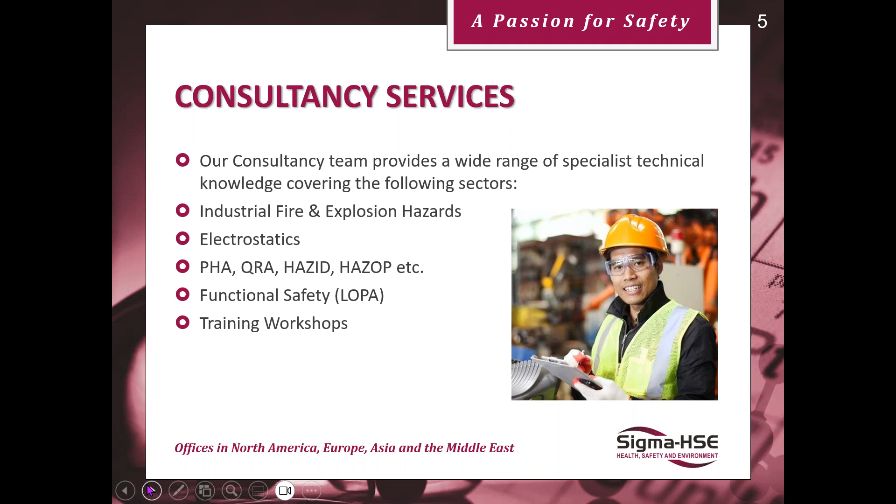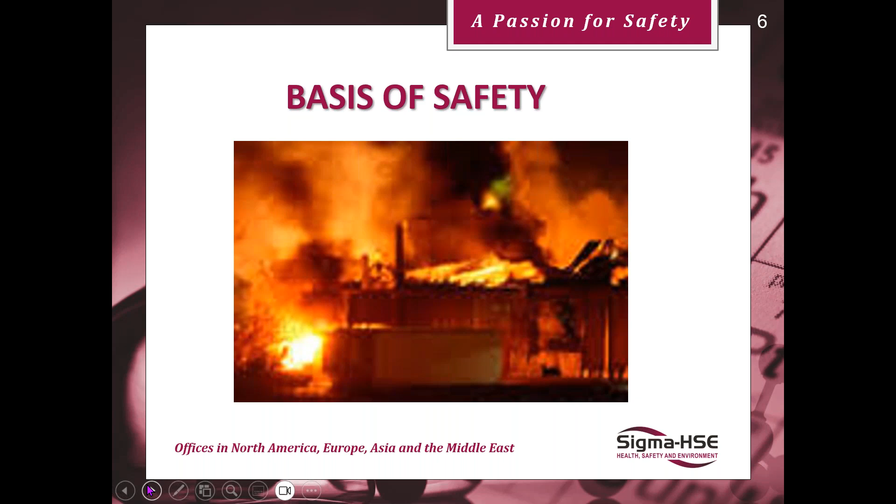So, off with the introduction, and now let's get into the nitty-gritty of the talk. We're looking at a basis of safety, and whenever you're looking at especially problems to do with fires and explosions, this is your ultimate aim, to put together a basis of safety so you can show to the regulatory authorities and your work staff that you are working safely.

So what is a basis of safety? Well, it's a combination of measures relied upon to ensure safety. It's not just one thing. You look at a whole range of things to get this combination together. It highlights the aspects of design and operation which are safety critical. Overall safety strategy can be applied to things like equipment, the process itself, the area where the process is located, and work instructions such as standard operating procedures, etc., or following equipment manufacturers' guidelines.

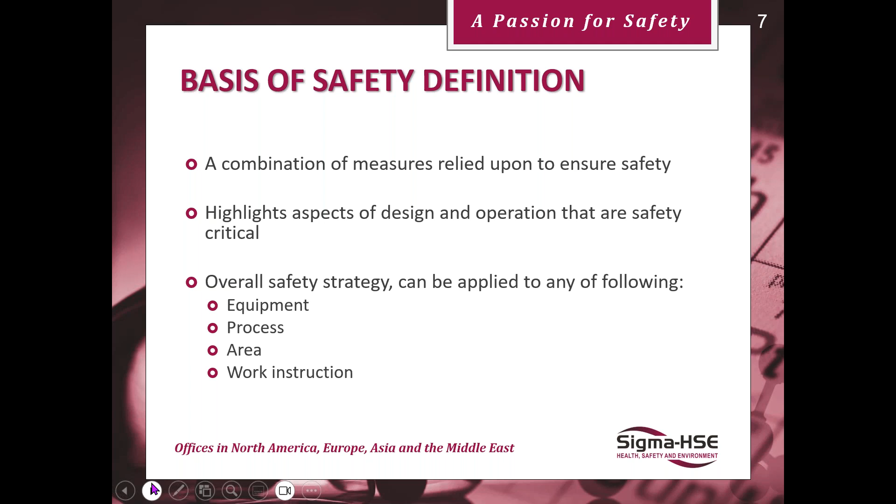In order to build a basis of safety, it is necessary to have information available. So a typical list, if we came in on your site and we were developing a basis of safety for you, we would like to see equipment specifications.

We'd like to consider what operating procedures you have in place to ensure that your staff are well trained and operate the equipment safely. We can review your hazardous area classification drawings, and of course with those drawings you should always have a report which tells you how those drawings were produced.

Maintenance procedures are always necessary because we need to know how you work. How do you maintain your equipment? What are your procedures in place for it?

Such things as what materials are being handled. Are they flammable liquids only, flammable dust, a combination of the two? And have you got data on them? For instance, for powders, we would look at minimum ignition energy, layer ignition temperature, minimum ignition temperature, the KST or dust constant, Pmax, etc.

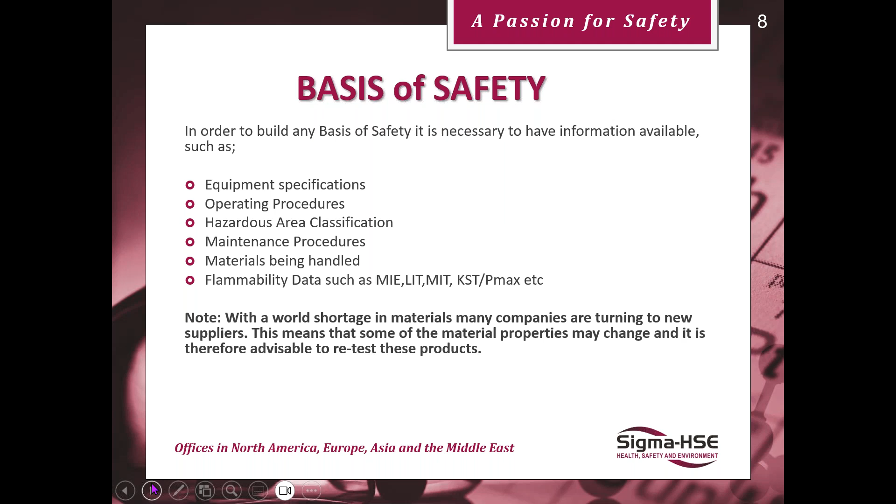And always remember that with the world's shortage in materials, many companies are turning to new suppliers. This means that some of the material properties may change. You may get finer materials or not so fine materials. They may be slightly different in their outlay, and therefore it is always advisable to retest these products if you do change your supplier, especially on a global scale.

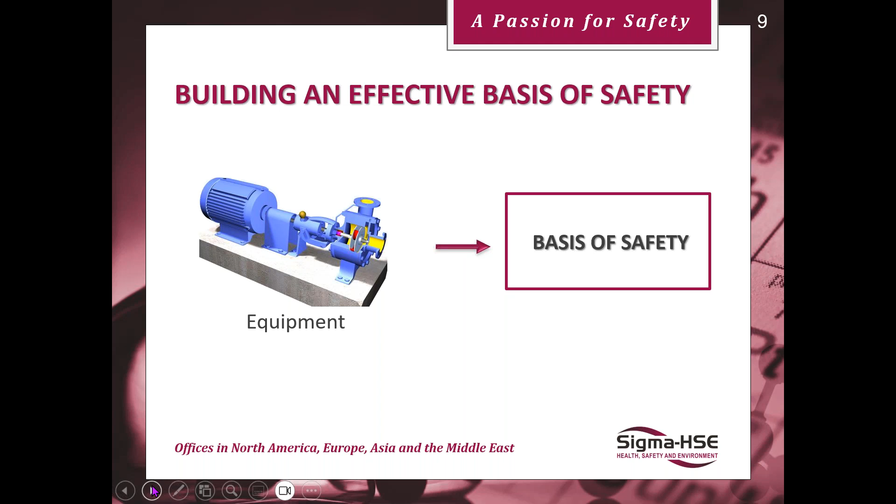So building an effective basis of safety, we start off with the equipment. This could be any type of equipment from a pump, silo, mixing vessel, etc.

Procedures, operational and mechanical. Standard operating procedures are common in industry, and nearly every company has them in place to ensure their staff are well trained on the use of their equipment and materials they're handling. This will go into the box of basis of safety.

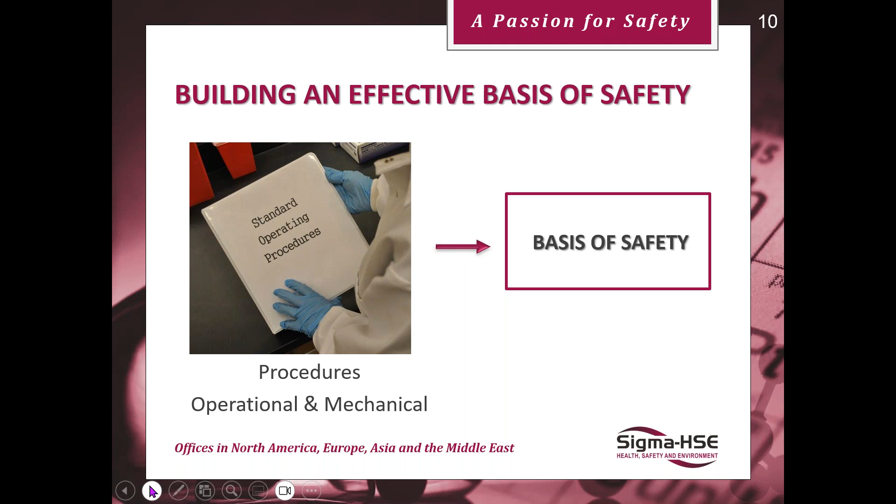So you may have to review it and change accordingly.

Human factors. Well, these are debatable. As you can see here with the Simpsons, they can be extremely intelligent or, in this case, very stupid. So you have to factor these things in. How can a human being affect what is going on with your basis of safety?

One of the advantages of a human is that if you're used to using the equipment, you can smell things, you can sense things are not right by your hearing. You may hear a rattle in the equipment or a grinding sound, which won't be picked up till later by sensors, but the human can pick it up.

On the other hand, the human being can do the absolutely amazingly stupid things, and these have been known to happen quite frequently. So you have to look to see how much you rely on human interaction with your processes.

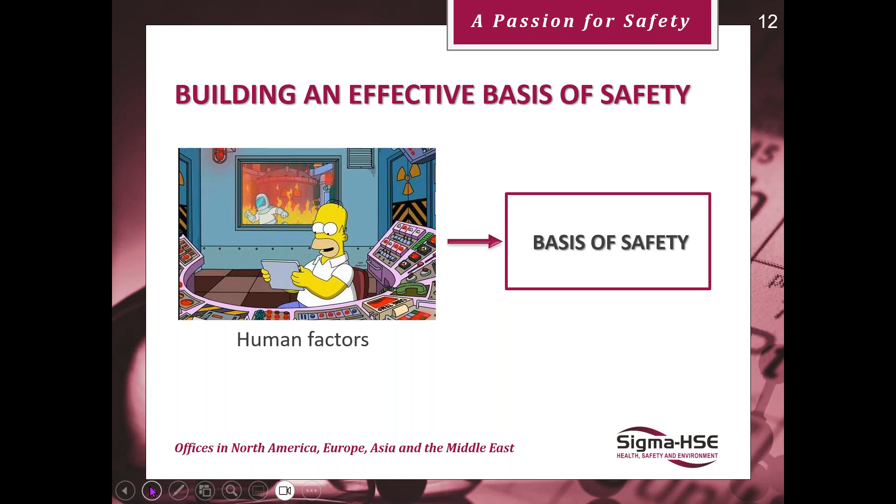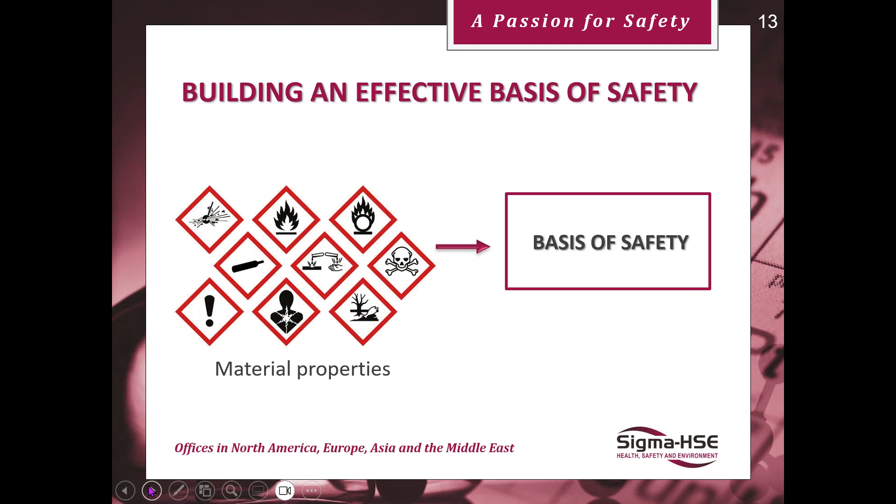Risk level and tolerance. Do you have a high risk that you can deal with, moderate risk, or a low risk? It depends where you're located a lot of the time.

For instance, if you work in a greenfield site in the middle of nowhere, you may not mind your explosion vents going off every day if you explain it to your staff. But if this is in a town next door to housing, you can't afford to have that happen.

We've had instances where a silo is on a hill and below it is an infant school. Again there, you can't have any risk at all. You have to double brace everything to ensure you work safely. You cannot afford to have an incident.

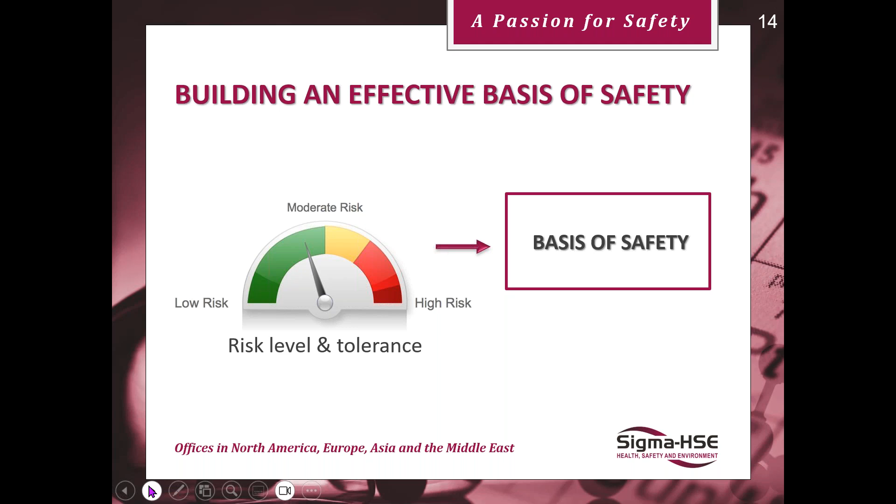And of course, there's many more. When you start looking at your processes, you may find other things which interact with the way you work and could affect the basis of safety.

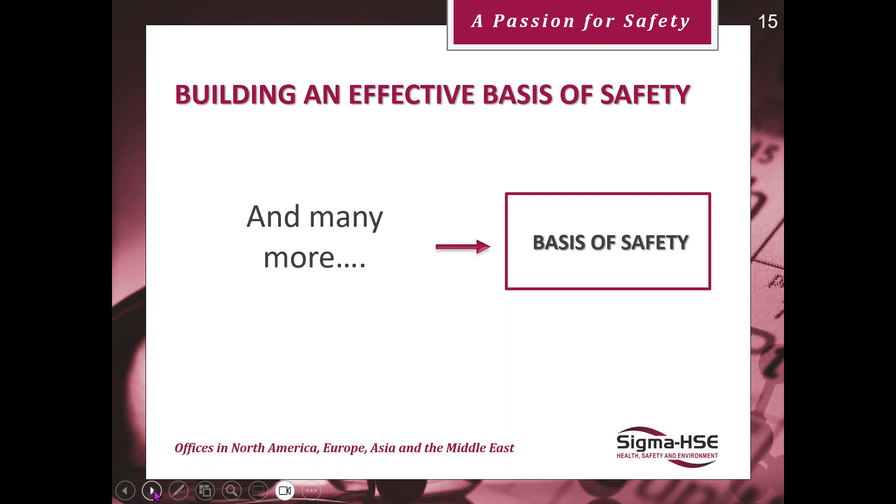We're looking at fires and explosions, and there's three types of basis of safety for fire and explosions. First one, explosion prevention, achieved by avoiding the flammable atmosphere. This could take out the fuel or take out things like oxygen or even the ignition sources, which is far more difficult to do. Avoidance of ignition sources.

Make sure that any ignition sources don't become active and don't become effective. Well, that's the most important thing. You can have an active ignition source as long as the energy is not strong enough to ignite your fuels. So, does it become effective?

And an often case for fires and explosions to do with dust and powders is explosion protection. It reduces the damage to plant and protects employees from the explosion.

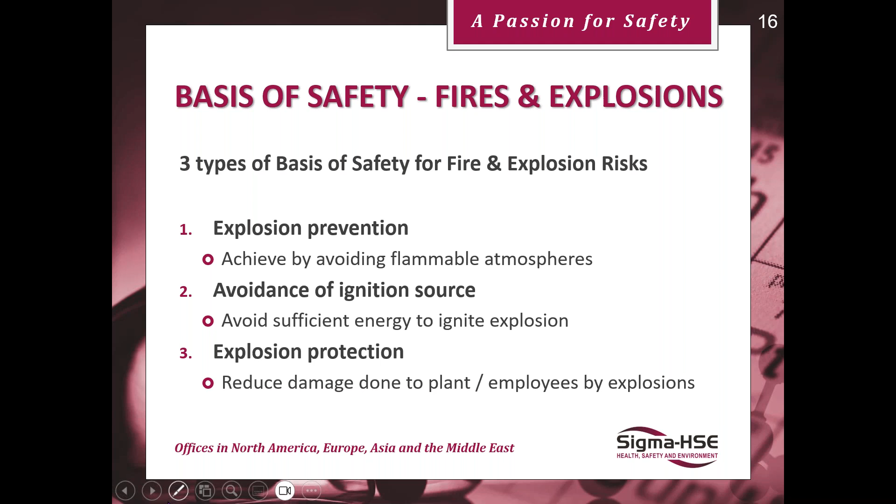So the conditions for a dust explosion. Firstly, the powder that you're dealing with has got to be flammable or combustible, and in the case of an explosion, has to be airborne to form a cloud.

As per liquids, the concentration must be within the explosible limits. Interesting here that we only take the minimum explosible concentration, we don't have an upper. That's because with powders, it's not homogeneous, and therefore you may have an explosion concentration occur when a bulk of product comes through a line, for instance.

You must look at the particle size distribution. If it's finer, then it's more capable of propagating flame and explosion.

The level of oxygen around needs to support the combustion, so you need to have an answer about that. You may work under reduced oxygen levels, but how low do you have to go to save your plant from blowing up? And you must have a sufficiently energetic ignition source, as I said before.

So down here we have the fuel, an ignition source, effective that is, and an oxidant. And then we get the fire triangle. If we add mixing of the oxidant in the fuel and we confine, then we get the risk of an explosion.

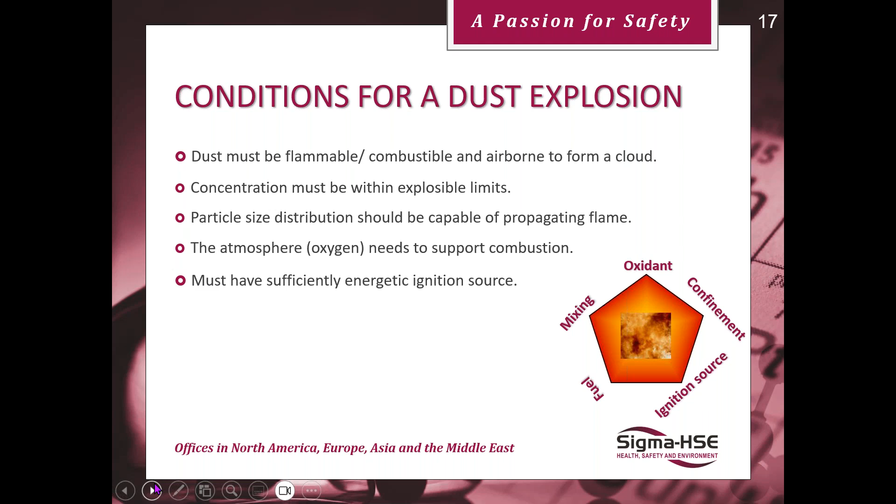So why is flammability testing so important? A lot of people say it's a waste of money. A lot of people say it's expensive. A lot of people say they haven't got material to use for it. Lots and lots of excuses out there not to get it done.

But at the end of the day, it's cheaper to get the testing done than to rebuild your plant because you haven't had it done and you don't know how to protect yourself properly. There's nothing worse than living with limited information to be able to make sure you're safe.

So you require it to understand the explosive properties of your materials. You may need it for the sensitivity of your materials to different types of ignition sources, such as mechanical, electrical, electrostatics, heat. It can help you determine whether you can stay outside the flammable limits. As I said, the upper is more difficult, but you may be able to work with good extraction below the MEC. And it's actually a legal requirement on European safety data sheets as of 2021.

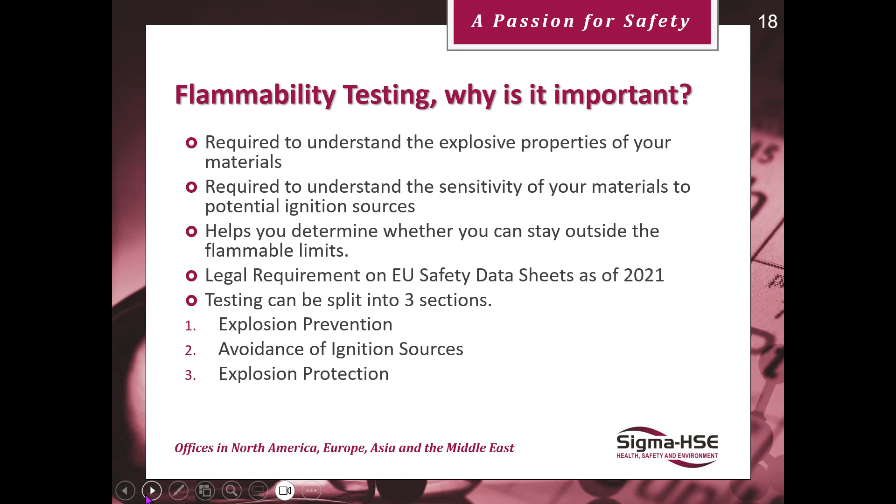Testing can be split into 3 sections, as I said before: explosion prevention, avoidance of ignition sources, and explosion protection.

With regards to the safety data sheets, or the SDSs, Annex 2 of REACH has been amended concerning the compilation of safety data sheets on the 1st of January 2021. And now it's a legal requirement on these sheets to include data: flammability, MIE, LIT, MIT, PMAX, KST, etc.

Lower and upper explosion limits, that'll be for liquids and gases, but for dust you want the MEC. And for liquids you may get the flash point and auto ignition temperature as well. But these are now compulsory.

So just pulling out powders and dusts, what are we going to look at? Well, you've got a whole range here. We can start with minimum ignition energy, which looks at electrostatic and mechanical ignition risk.

Minimum ignition temperature considers dust clouds on hot surfaces. Layer ignition temperature considers layers of powder on hot surfaces. And explosion protection or violence, you get the maximum explosion pressure, the dust constant, KST, and the dust class.

ST is Staub, so German, so you get K, ST, dust constant. MEC considers flammable range, minimum explosive concentration. LOC, limiting oxygen concentration, if you're thinking about inerting.

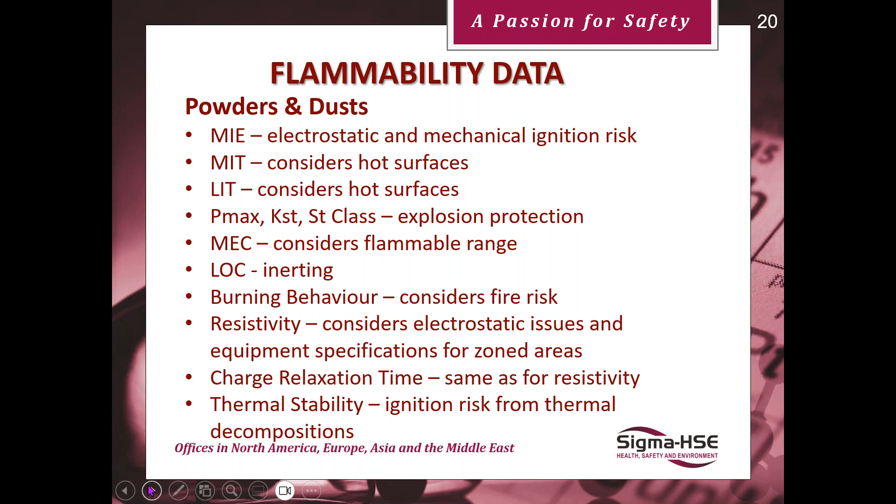So let's look at explosion prevention first.

The Group AB classification test uses the same tube as the minimum ignition energy test, similar piece of kit. It determines whether a material will form a flammable atmosphere when dispersed in air as a dust cloud. If it does, you're then subject to DSEAR and ATEX, Dangerous Substances Explosive Atmospheres Regulations, and Atmosphères Explosibles, the French term for explosive atmosphere. This originates in the EU, but more countries around the world are adopting this approach to ensure safety.

So we get two categories: Group A, flammable or explosive as a dust cloud, and Group B, non-explosive or non-flammable as a dust cloud. Just because it's Group B doesn't mean it won't ignite as a powder layer, so be aware of that. Group A is covered by DSEAR and ATEX, Group B is not. These tests are conducted under British Standard EN ISO 80079-20/2, 2016.

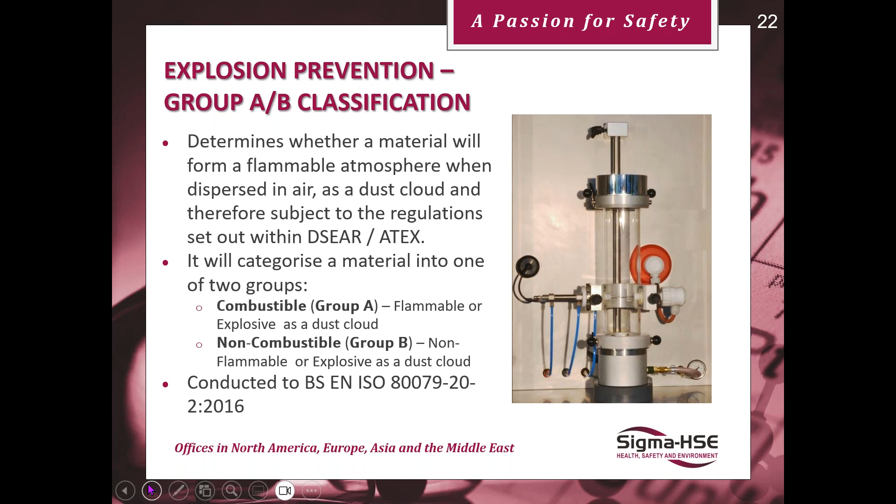Limiting oxygen concentration is the minimum allowable concentration of oxygen in a mixture of dispersed combustible dust, mixed with air and inert gas, in which an explosive atmosphere will not occur. It's generally higher than for gases, typically 10 to 15%, although some pharmaceuticals I've been involved in have gone down to 4%, which is extremely worrying since a lot of people use 5% as their basis of safety. In two or three instances, pharmaceuticals have gone down to 4%, so it pays to get it tested to make sure.

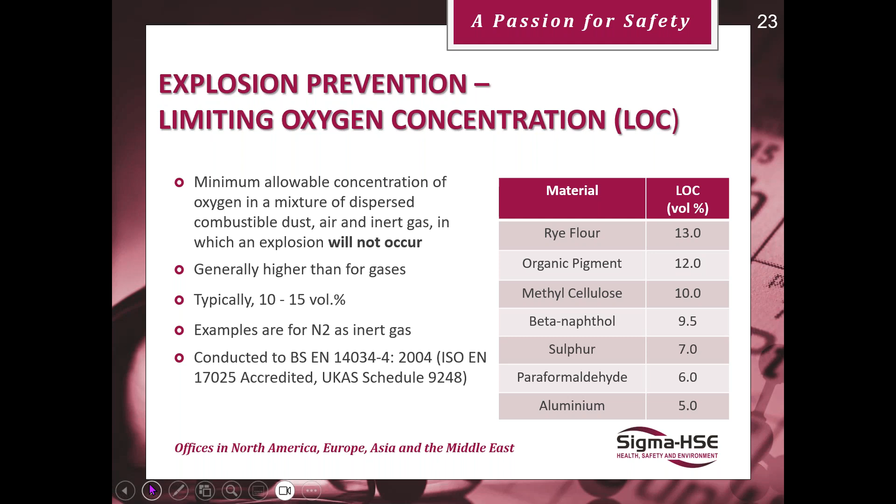Explosion prevention can also look at the minimum explosive concentration, the minimum quantity of dust dispersed in air required to form a flammable atmosphere. It's measured in the 20-litre sphere test, no prizes for guessing why it's called that. Sometimes the MEC is referred to as the lower flammable limit for powders, again under 14034, this time section 3, 2006. A typical example: 2 metres away from a 25 watt light bulb, 40 grams per cubic metre, you can't see the light bulb. Whoever came up with that, I'd like to meet them, because I haven't got a clue why they use it. But we've had dust MECs down to a lot lower than that, down to 20 grams per cubic metre.

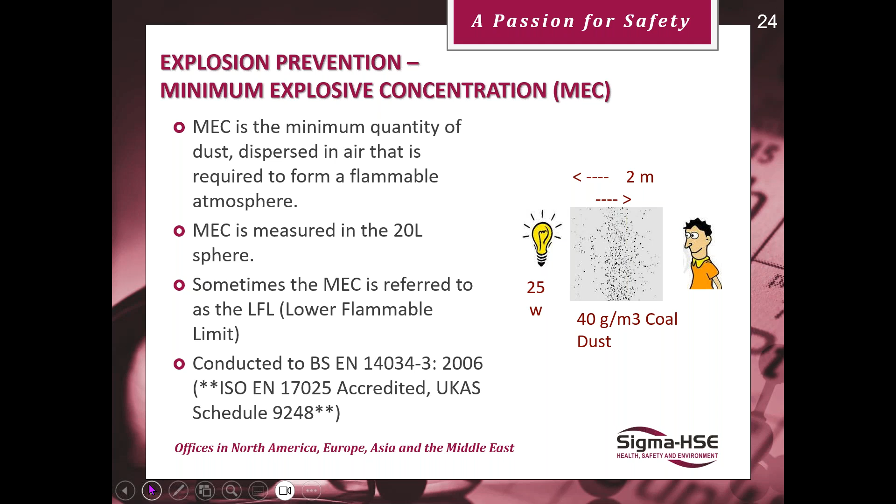So next, we've gone through explosion prevention. Now looking at avoidance of ignition sources, a separate basis of safety. This is taken from EN 1127. You can see 13 effective sources of ignition spaced out there. In reality, we only tend to look at about 6 to 7 of these, but we do take note if we're in areas where you may get visible and HF electromagnetic radiation, or radio frequency electromagnetic radiation. In some instances we may need to add to this, but normally it's about 6 to 7 that we concentrate on.

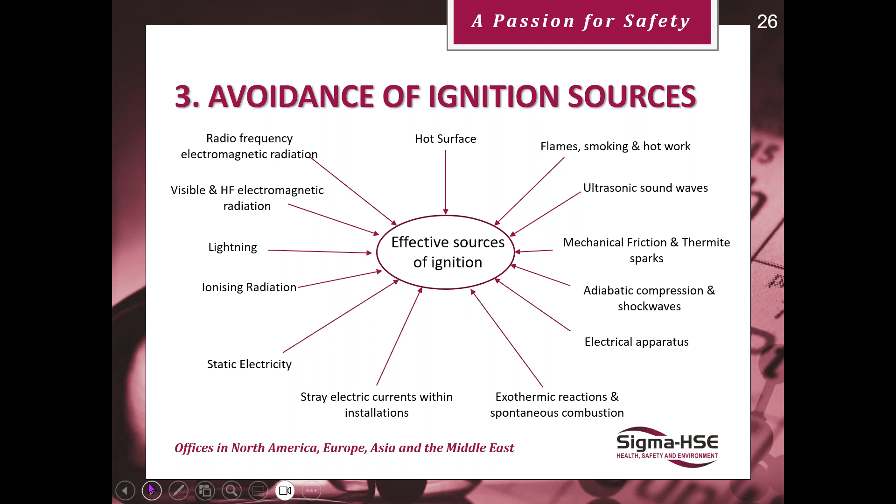Electrostatics - this is the minimum ignition energy, the lowest spark energy that can ignite the optimum mixture of fuel and dust. It ignites the optimum mixture. Every mixture has its ignition energy, but it is only one MIE.

Normally, for electrostatic discharges, you would find the capacitive discharge method used, purely capacitance. This is similar to a human being sparking. Be careful if some companies offer the VDI method of testing, as they may give you the mechanical spark instead, the inductive discharge. Sometimes these can be a factor of 10 lower than the purely capacitive one, so be very careful when you get the data. You should only use the inductive discharge method for mechanical sparking, not for electrostatic discharge.

Any ignition source with an energy greater than the material's MIE is capable of igniting the flammable atmosphere. In Europe, it's BS EN 13821 of 2002. And we've also got 80079-20-2, 2016, which is the electrostatic Bible in the EU.

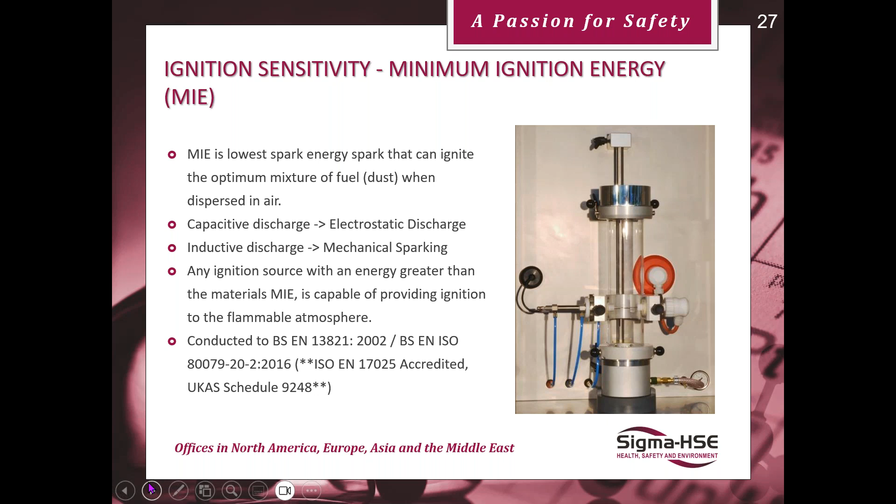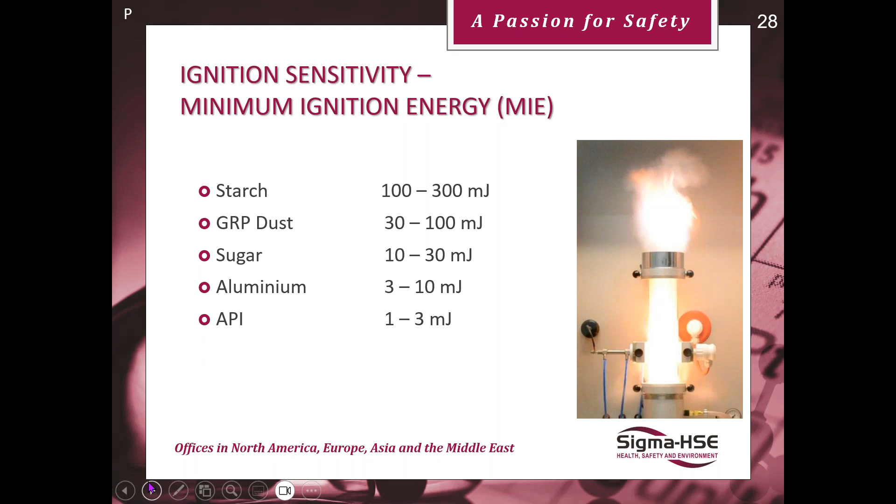Typical values here: starch 100 to 300 millijoules, glass reinforced plastic dust 30 to 100 millijoules. Sugar 10 to 30, though very fine sugar can go down less than 10. Aluminium 3 to 10, and active pharmaceutical ingredients down as low as 1 - in fact we've had them lower than 1. So again, you have to be careful with your products and understand what you're working with. Some are very high, 500 millijoules plus, and you may not have a concern with them, but the lower the ignition energy, the greater risk you're dealing with.

Talked about the minimum ignition temperature, MIT. This is the lowest surface temperature that can ignite the optimum mixture of fuel when dispersed in air. MIT is basically the auto-ignition temperature for dusts. So you have AIT for liquids and MIT for dusts.

It's used to calculate the maximum permitted surface temperature of equipment, and you can operate in the range 200 to 700 degrees C. We conduct it to BSEN 50281/2/1, and again, you can find it in the ISO 80079-20-2 2016 standard as well.

Complementing the MIT is the LIT. This looks at layers as against dust clouds. LIT is the lowest surface temperature that can ignite a 5mm layer of material. It's used to calculate maximum surface temperatures of equipment, and if you want to do this, you must combine it with the MIT value. The range is 200 to 400 degrees, and it's to EN 50281-2-1.

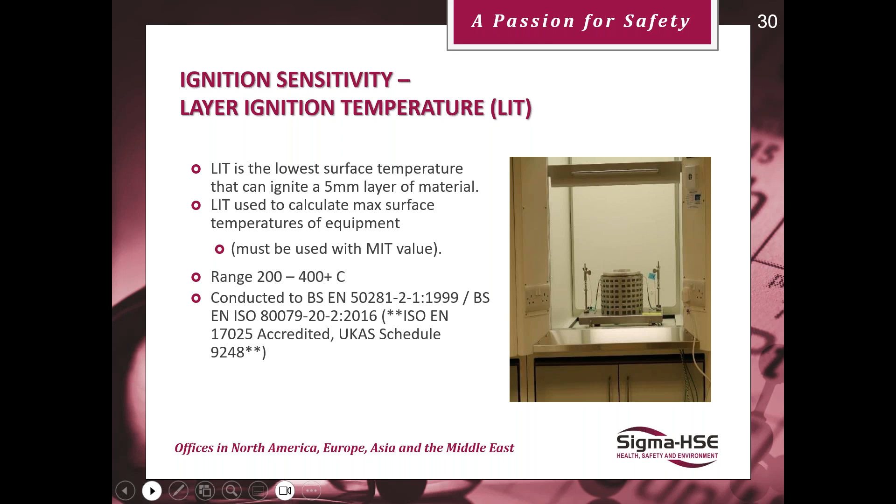So most common ignition sources: electrostatics. The risk is normally quite high due to some dusts having very low MIE values, down to less than 1, similar to gases and vapors.

You consider flames and hot work. If you have these around, the risk is high, but often these are covered by operational procedures to stop flames being present and control hot work temperatures.

Hot surfaces: risk is moderate as many values of MIT and LIT are quite high, although some materials do have much lower values, such as sulfur or sulfur salts. These can be as low as 200 degrees.

And electrical sparks. All electrical equipment must be suitable for use for any given flammable dust. So you must look at the hazardous area classification and the material you're putting through in that area.

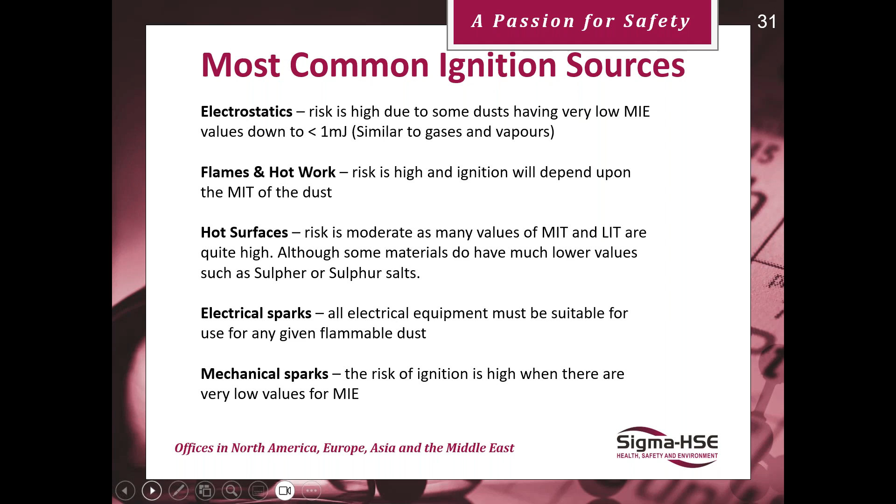A high level of risk is mechanical sparks. Here the risk of ignition is quite high, especially when you have low MIE values. As I said, you do this test with inductance and combine it with the MIT value.

So looking at the dust explosion risk here, you can see we've got mechanical, overheating, open flames, electrostatics, welding, electrical, and others, which no one's managed to find out what caused the problem.

Overall, there's about 40 dust explosions yearly across the world. This can result in injury and loss of life. You may end up having plant repair, compensation, and reputation damage, because a lot of people don't want to work with a company that's blown up their plant.

It causes business interruption and loss of the market, because while you're not producing, someone else jumps in and sells their product. And of course, you've got the insurance company. They're not too happy with reinsuring you if you've just blown your plant up through negligence.

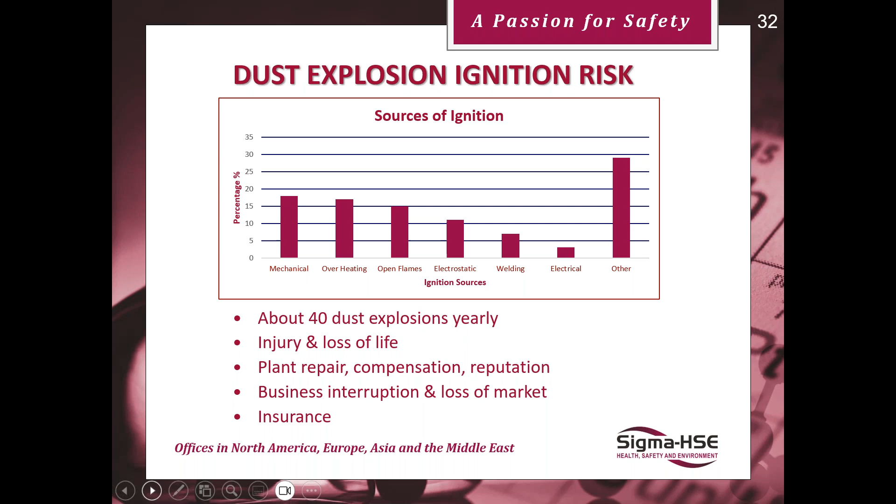So let's look at hot surfaces and temperature classes for dusts. As I said before, these involve two pieces of kit. The maximum surface temperature of the equipment is decided with the LIT or MIT of a worst case material that you're using. The temperature class of the equipment exists so that it can be properly specified for this application, and this will tell you what temperature class the equipment can be in.

So if dust clouds are likely, then the Tmax is less than 2/3 of the MIT. If dust layers are present as well, then the Tmax is also less than 75 degrees off of the LIT. Usually, because the LIT leaves the material for a longer period of time, this ends up giving you a lower result. So normally the LIT tends to constitute the maximum surface temperature.

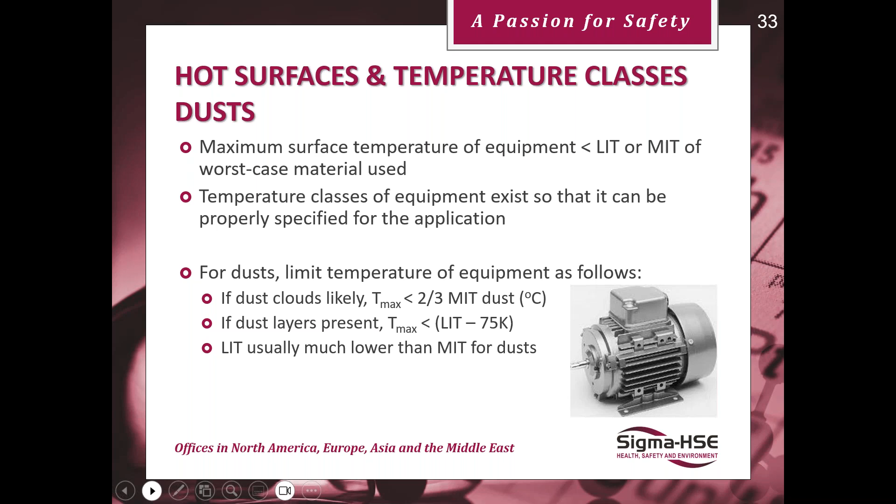Mentioned flames, smoking, and hot work. Well, hot work should be controlled by permitting. This is quite common today, and it should be the norm across your factory where you work. People should not be allowed to work with hot work or flames unless they have a permit to do so.

And a word of warning here, it's not a case of just issuing a permit. Before you issue the permit, you need to find out in detail what materials are in that area. Are there materials still left in the equipment when they finish, etc. So it's not a case of just writing out a permit. You need a lot more information on it before you allow people to use flames or hot work in that area.

Make staff aware of the hazards to avoid likelihood of common ignition source problems. Talk to your staff. Explain how these materials ignite. Get companies like us in to give a short training session for technicians or people working with these powders so they have an understanding and they're not scared of it, because they understand you understand the problems and you're handling them correctly.

Not so common today, but smoking must be banned in hazardous areas, in fact right across the factory, and only permitted in designated areas. Also control all access to hazardous areas. In other words, if people are working in hazardous areas, you need to control the movement of people in and out.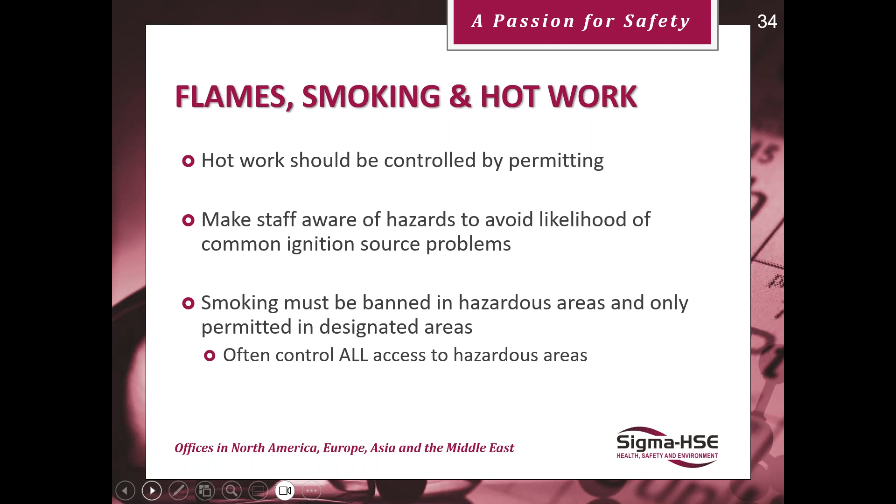Electrical equipment for dusts. Electrical apparatus in hazard areas must be suitable for use in the area depending on the following: the MIT and LIT, as said before, for surface temperature, zonal classification of the area in which it is to be located, whether it's zone 0, zone 20, zone 21, zone 22. You need to look at ingress protection, the IP rating, and the type of powder.

Is it conducting or insulating? Conducting powders can be very dangerous with electrical equipment because they allow the electricity to flow across the powder.

A typical example here is the European sign of conformity, the EX, which shows explosive atmospheres, Group 2, Category 2, dust. EX there means it's been tested properly and understood by a registered test house. And TB is the type of protection, 3C, so it's fairly low, temperature of 80 degrees C, and protection of Db. This is the typical sort of thing you will see on a label on a piece of electrical equipment.

Electrical equipment must be installed and maintained by competent personnel. We recommend people who are CompEx certified are the only people allowed to work in hazardous areas and wire up, put in, and take out electrical equipment.

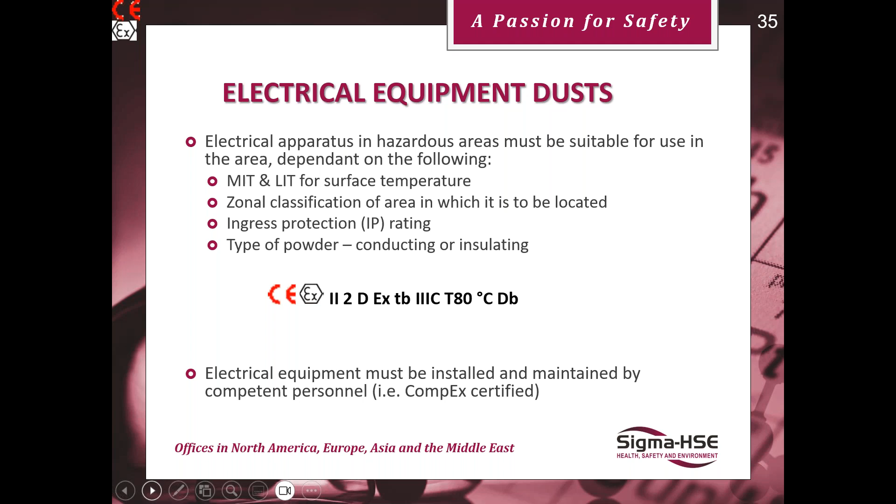Equipment in hazard areas should undergo a non-electrical equipment ignition risk assessment, or NEIRA, showing that you've looked at it for mechanical sparks and mechanical ignition, and the non-electrical equipment is as safe as your electrical equipment.

How do you prevent mechanical sparking? Reduce the energy below the MIE of dust. If you get a low MIE, the chances are you stand more chance of getting a spark. So the MIE needs to be as high as possible to stop the sparking.

Use slow rotating equipment. Less than 1 meter a second is the norm, and if you can do that, the risk of ignition diminishes considerably. Make sure you've got things in place to remove tramp metal or stop it getting into the system and foreign bodies getting in. Consider externally mounted bearings and seals rather than internally mounted bearings.

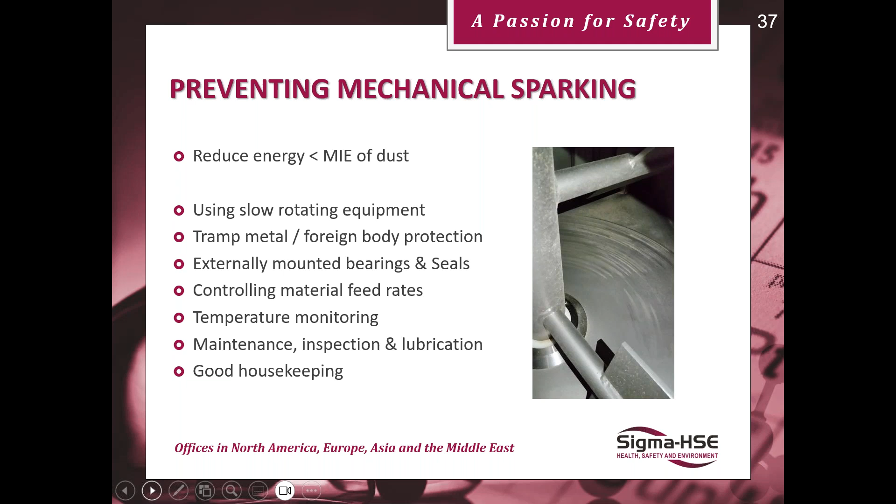So, non-electrical ignition risk assessments - quite a list of things we should look at. The European form of conformity marking, ingress protection ratings, know the speed of the moving parts.

Consider earthing of the vessel. That includes things which rotate - these have to be earthed along with the stationary things. The materials of construction - is it made out of aluminium, stainless steel, plastic? Is it made of brass or what?

Temperature rises and ratings of your equipment. Do you get sparks being emitted? Can they be emitted? Check out the equipment. As I showed you the previous one, they didn't realize that the blades were hitting the end, and the maintenance people hadn't even noticed it.

Selection of materials to avoid electrostatic discharges. Normally you're stuck with what you've got. It's very difficult to avoid electrostatic discharges because you're producing a product and you have to stick with that product. Avoidance of frictional contact between steel and certain alloys.

Make sure that you are aware of the different types of alloys. For instance, if you have a rusty blade and you hit aluminium, then you can get a thermite spark.

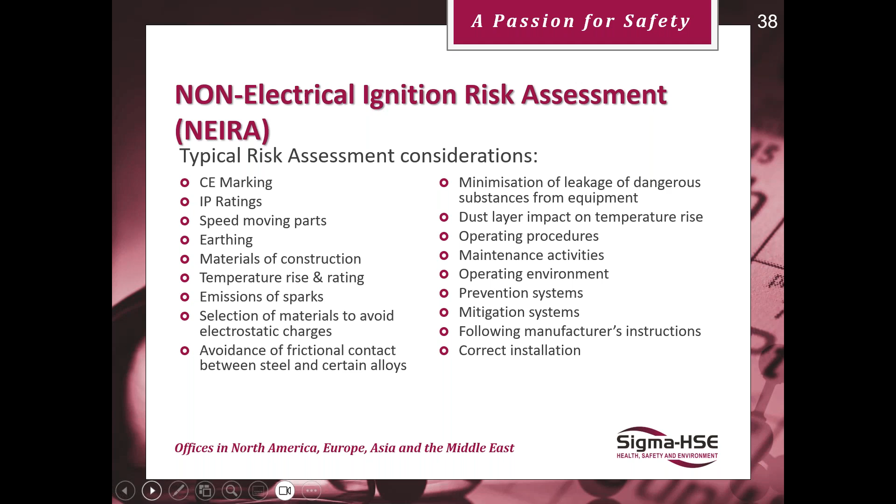Is it salty near the sea? Is it near a potentially gas or vapor area, etc.? Have you got prevention systems in place? Do you have mitigation? If something does go wrong, can you mitigate the risk? Are you following manufacturer's instructions correctly? And has all the equipment been installed correctly by trained people that understand the equipment and know how to fit it in, including competent engineers to look at the electrical installations?

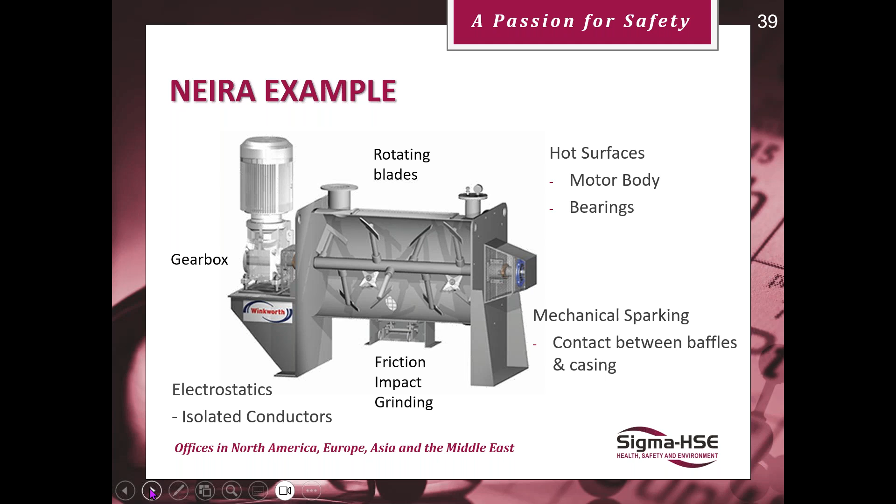Here we've got a short blender. We've got a gearbox, rotating blades, hot surfaces, mechanical sparking, friction, electrostatics. So we've got hot surfaces, the motor body, the bearings, mechanical sparking, contact between the baffles and the casing, friction, impact and grinding sparks from the blades going round, electrostatics, because the blades are rotating and could be metal - are they isolated? In that case, you could have an electrostatic discharge.

So, static electricity. Funnily enough, out of all the ignition sources we have, this is mentioned explicitly in DSEAR and ATEX as one of the ignition sources to be controlled. They believe it's the source of many ignitions, and when you look at that graph, others may possibly be caused by static, but they can't prove it.

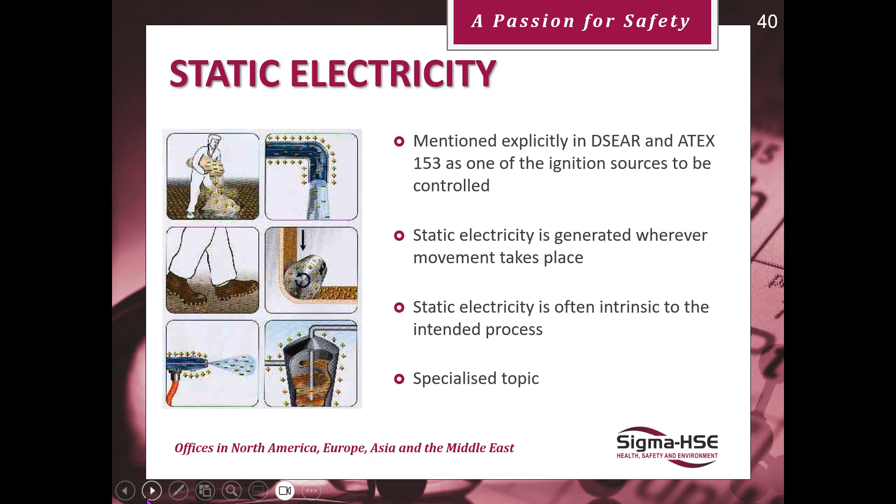It's generated wherever movement takes place. You see the examples there: pouring the powder, insulating liquids down a pipe, walking, insulating things going around a roller, sheets, spraying, and going into a blender type operation where you're getting large amounts of static buildup. Always be aware it's often intrinsic to the process, and it's very difficult to eradicate if you have a lot of problems there.

So how do we assess the static hazards? First, you want to know, do you have a flammable atmosphere? If the answer is yes, then you need to look at charge generation. Can charge be generated on the equipment, isolated conductors, for instance, on the powder itself? And if you do get charge generation, can it accumulate?

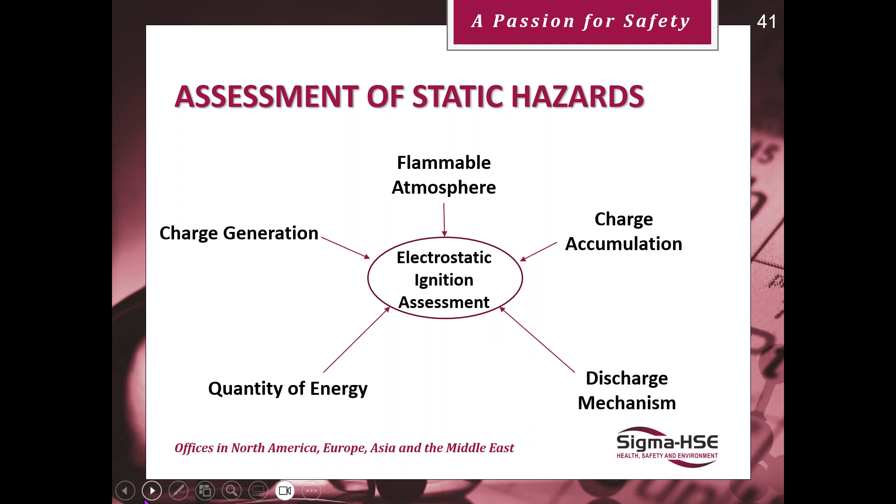For instance, you may have a conducting powder which can generate charge going through pipes, and then you drop it into an insulating drum, and therefore the charge can accumulate in the insulating drum, even though it's a conducting powder. What quantity of energy is produced here? And what is the type of discharge mechanism you're looking into that could create an electrostatic discharge?

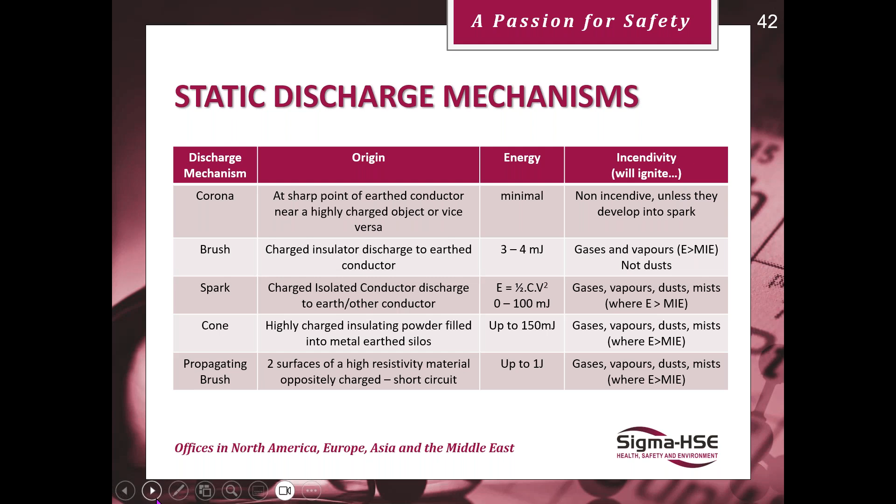I have seen one instance where cellulose tape was being produced and the waste was being put in a low load waste disposal unit. The guy went to touch it, got hit by a propagating brush discharge from the cellulose laying along the metal container, and that put him in hospital. The whole of his arm blackened and his chest blackened. Extremely dangerous things.

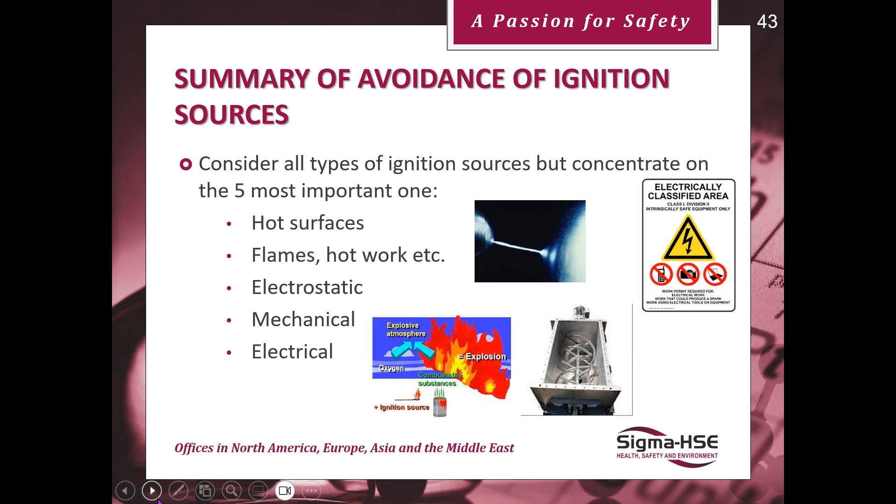So, summary of avoidance of ignition sources. Consider all types of ignition source, but concentrate on the ones here that I'm just saying to you: hot surfaces for powders and layers, flames and hot work, electrostatic, mechanical, and electrical. If you've got any of the others which you think are there, then you must consider those as well.

So how do we go about avoidance of ignition sources? Perform hazardous area classification, ensure all the equipment is suitable for use in the zone, consider more detailed assessments for electrostatics, electrical and mechanical, etc. Control naked flames and hot work by a permit system. Obtain suitable flammability data. How can you prove a basis of safety without it? It's impossible. Understand if a potential source of ignition can become active, and can it become effective? This all has to be written down in a basis of safety report, which is legible, readable, and not overcomplicated.

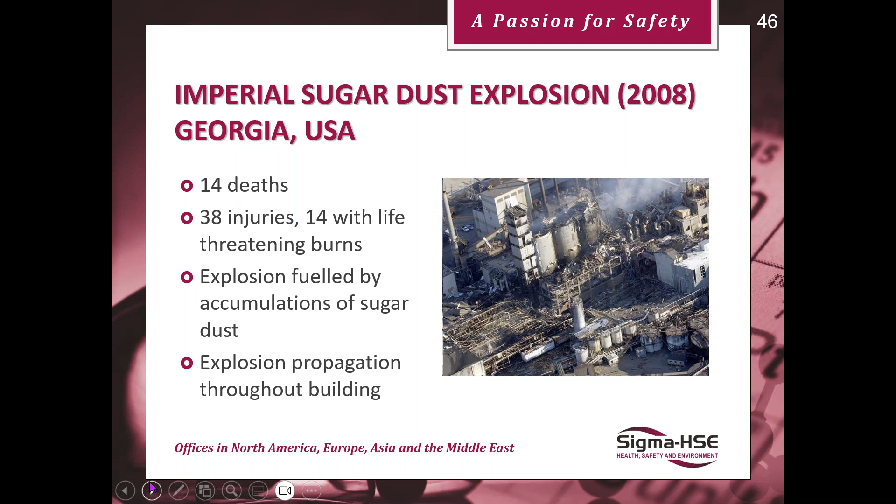So the final one we're looking at is explosion protection. The example, which I expect you've seen before, is Imperial Sugar 2008: 14 deaths, 38 injuries, 14 with life-threatening burns. Explosion fueled by an accumulation of sugar, and the flame propagation caused this. There was no form of isolation, no understanding of the transference of dust cloud explosions. Basically a total ignorance of dust clouds and how they can damage and destroy plant and people.

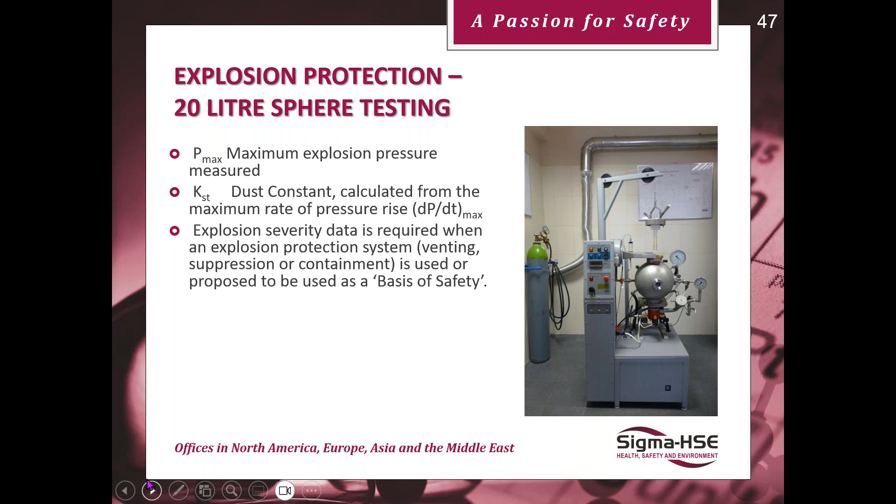So for explosion protection, we get the 20-litre sphere. There's a picture of it there. Maximum explosion pressure generated in the explosion, the dust constant, calculated from the rate of pressure rise there. Explosion severity data is required when you're looking at venting, suppression, or containment. If this is used as a basis of safety, then you'll need explosion protection data to back it up.

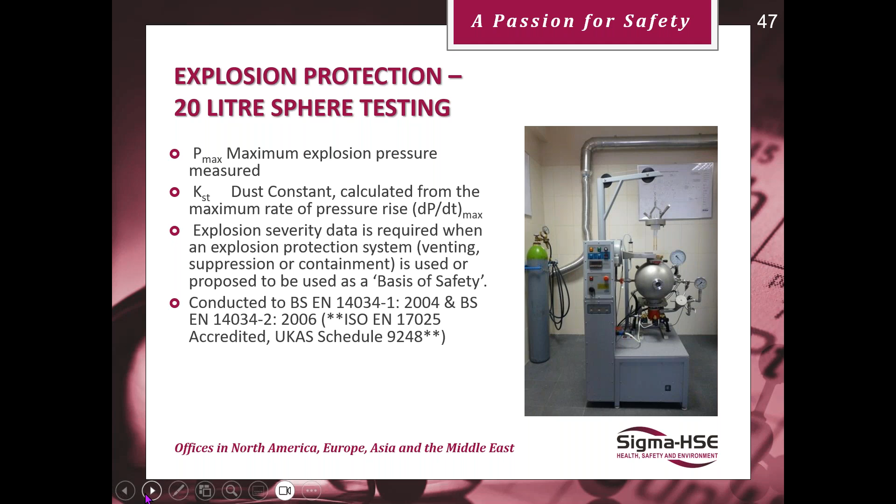Conducted, as I said before, 14034-1 and also 14034-2. ST0, no explosion basically. Staub 0, Staub 1, between 0 and 200. Funnily enough, even though the sugar was classified as a weak explosion, it killed 14 people and blew a whole factory up. ST2, between 200 and 300 KST, what's recommended as a strong explosion: cellulose, wood flour, polymethyl acrylate, and the big boys. All of these are greater than 300.

Very strong explosions: anthraquinone, aluminium, magnesium, the metals there. And the biggest one we've ever came up against was aluminium lithium hydride. And you know what that makes? Car batteries. And this is the biggest explosion by a long way. This came out at 3 times the explosion violence of a hydrogen air explosion. So yeah, if you want to get car batteries, this is what comes along with it.

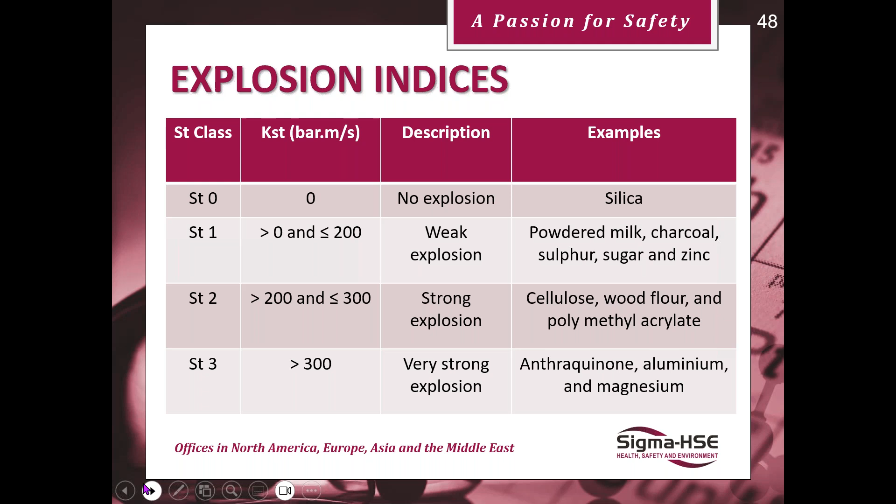So mitigate the risks. If the risk cannot be eliminated or controlled, then you have to look at ways you can mitigate it. Reduce the number of employees, not often possible. Avoid the propagation of fires and explosions, one of the most important things. Use explosion relief arrangements, explosion suppression, or contain the explosion. Other such things as personal protection equipment. Take account of worst case always, and make sure you handle, store, and transport the dangerous materials properly.

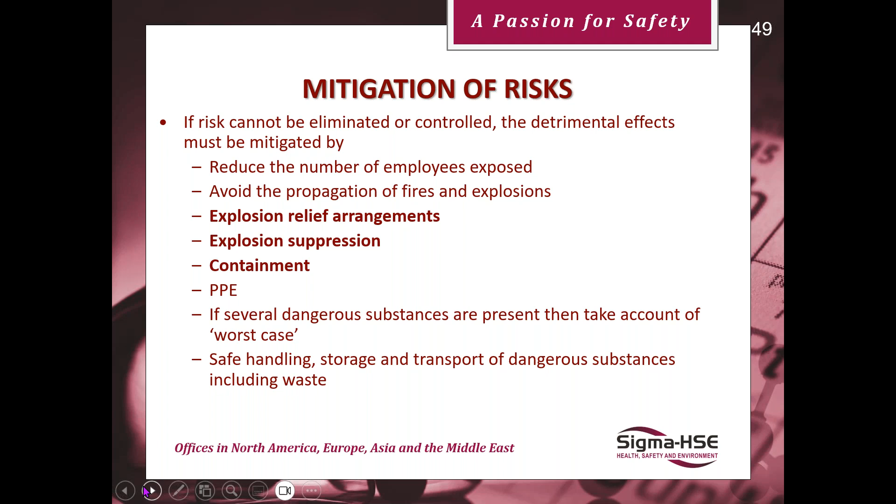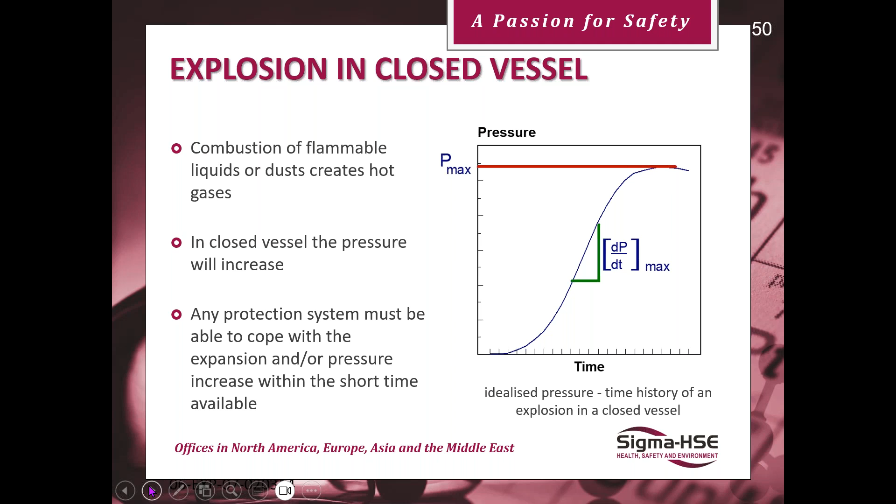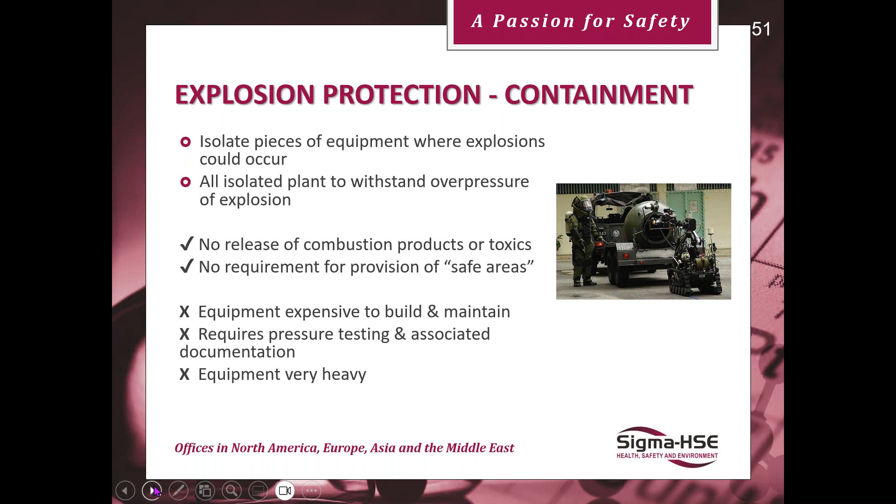You need to make all parts of the plant strong, including the pipes, ducts, flanges, covers, etc. They must withstand the maximum pressure that is expected and maintain that over the life of the source. Your maintenance people have to understand why there's 27 bolts there, whereas when they're working under the normal plant, there's only 6. They have to be instructed to make sure all 27 bolts go back in. Strong plant is expensive to build and can be difficult to operate.

The most common way of dealing with explosion protection is venting. This protects the plant and personnel from the effects of an explosion. It forms a controlled release of pressure via weak open sections. The vent sizing is dealt with from the Kst, which is the rate of pressure rise data in the 20-litre sphere.

Plus it gives the ability to control the release location, normally outside the building in a safe area. Passive protection systems can be retrofitted to weak equipment, so you can put it in weak equipment.

The bad thing about it is that combustion products and overpressure are released into the atmosphere. One company I talked to, I asked them why they wanted the data for an explosion relief panel, and it was going to blow highly toxic material over their car park. So it wasn't such a good idea to have explosion relief panels in place. I pointed this out to them.

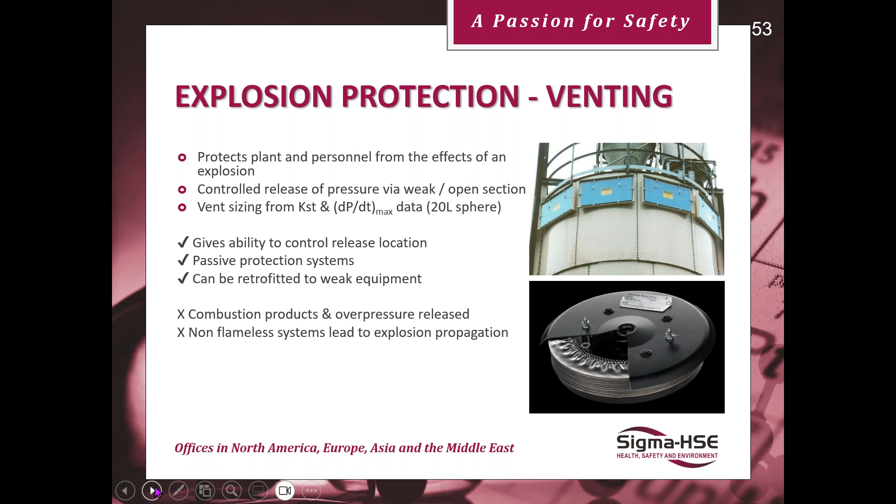Non-flameless systems lead to explosion propagation. So the advantages: you can design it in-house, it's relatively cheap for the vent itself, needs little maintenance except for the doors where you need to make sure they can be kept clean, and it has a very wide range of application.

Disadvantages: the material is released into the atmosphere, so it's unsuitable for toxic corrosives. It must discharge outside the plant, so it restricts the siting of plant items to the walls, and large safe areas are required for the release of the gas and pressure.

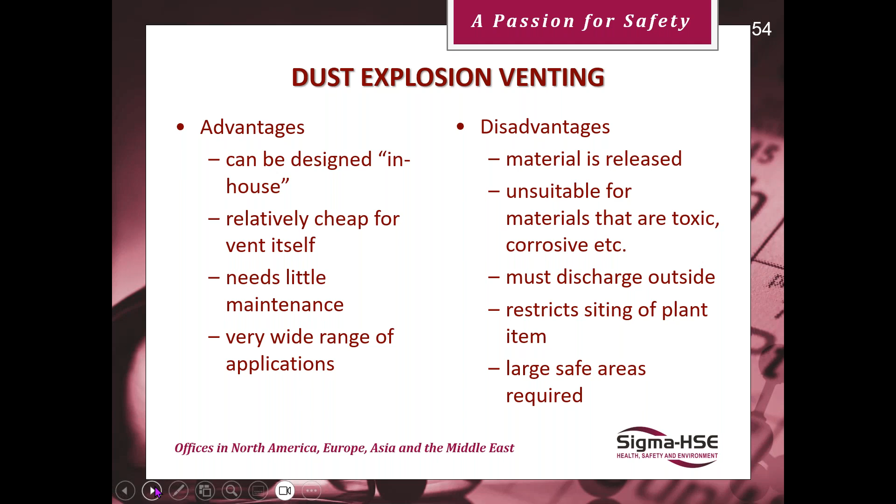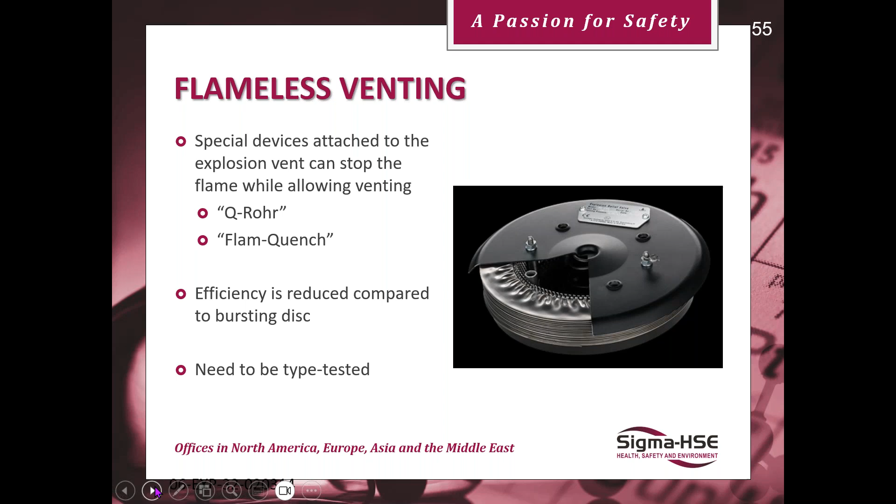Flameless venting has come onto the market and it's quite popular in different industries. You can have the Q-Rohr, Flam-Quench, etc. It stops the flame while allowing the vent. Efficiency is reduced because of the way the system is built compared to normal venting, and it needs to be type tested.

It stops the flame coming out - that's why it's called flameless venting. But always be aware that high pressure and smoke can still fill the workplace, so try to keep it away from where personnel are located. It must be sited in a restricted area.

I've seen flameless vents with all sorts of things outside of them - bits of loose equipment, cardboard boxes, pallets - and the pressure coming out can blow these things up into the air and create a real hazard for people. It requires regular maintenance as well, and it must be suitable for the materials being processed. Sugar, for instance, caramelizes and blocks the vents, so you need to check this on a regular basis.

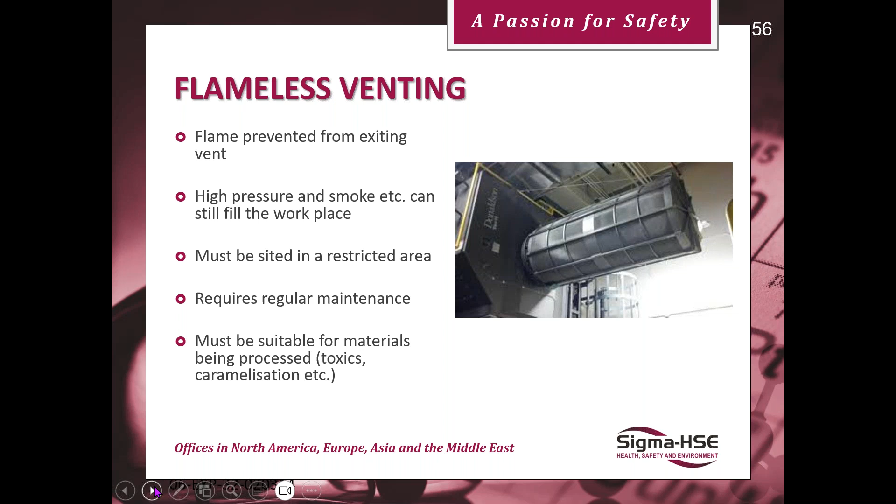Explosion relief doors don't require replacement after the explosion. They close up, easy to maintain and cheap to fit. You need to make sure the door doesn't close too quickly after the explosion - I'll show you why in a minute.

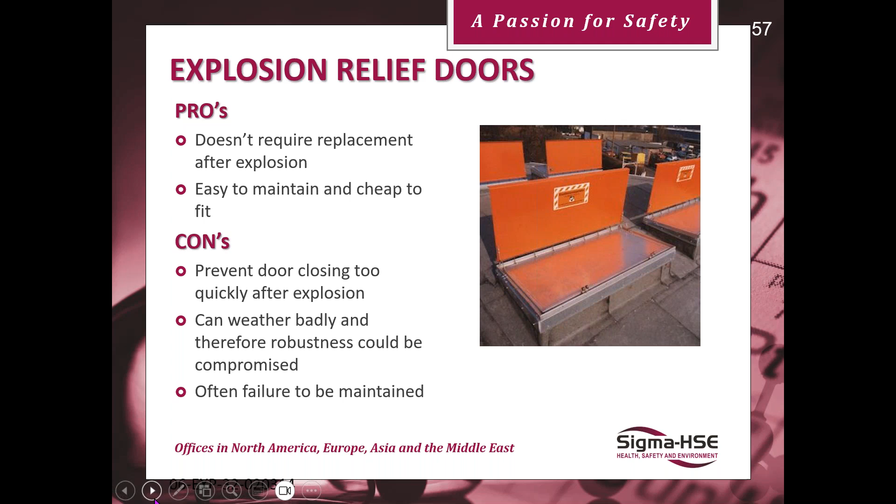They can weather badly, as they're normally in outside areas exposed to all different types of weather, and the robustness can be compromised. Often they're not maintained properly, so they rust and you get collections of dust all over.

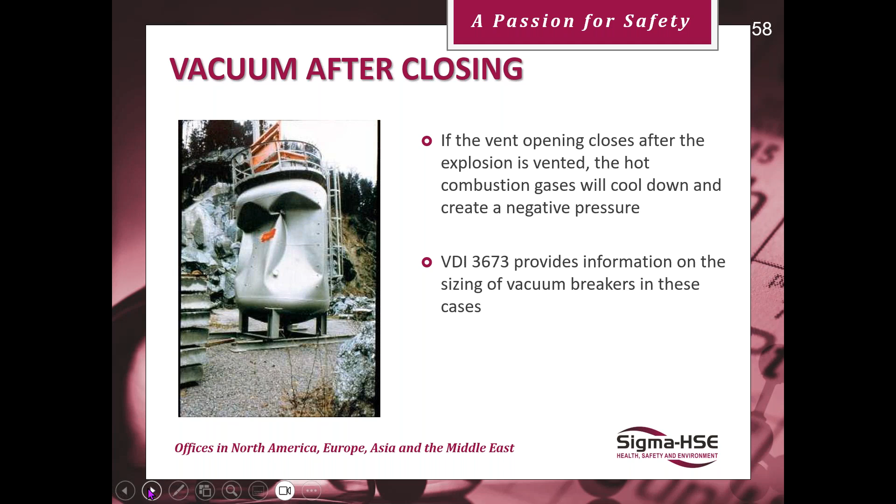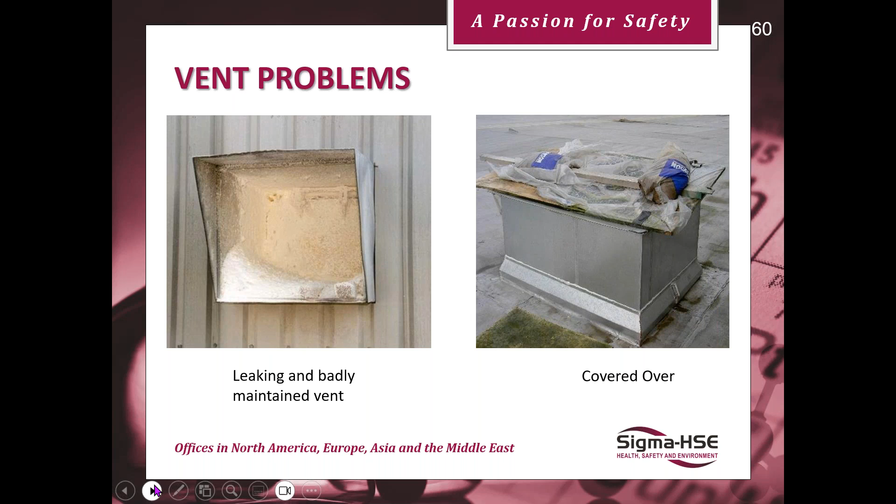Width's difficult to predict, but there is a way you can predict for gusts. Typical vent problems include leaking and badly maintained vents - someone's put a plastic cover with weights on over that vent. So it's got to be looked at and maintained properly. Don't just put it there and ignore it.

So you've got explosion protection suppression systems. These extinguish the explosion in the early stages through injection of pressurized suppression agent at given points around the vessel, as you can see. There's no external effects and it's suitable for toxic materials, but it relies on effective explosion detection, highly specialized design, and is expensive to put in.

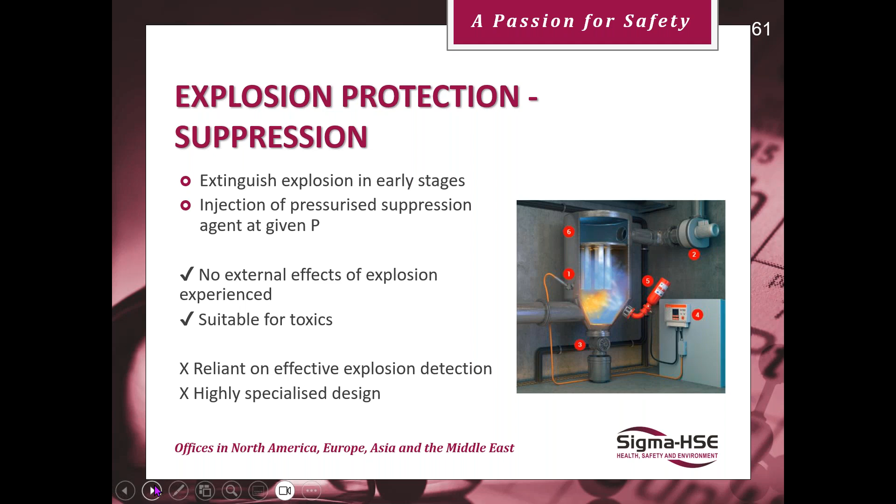So there's no release of material, no restrictions on where you can put the plant, no flame propagation, and a well-designed system incorporates isolation.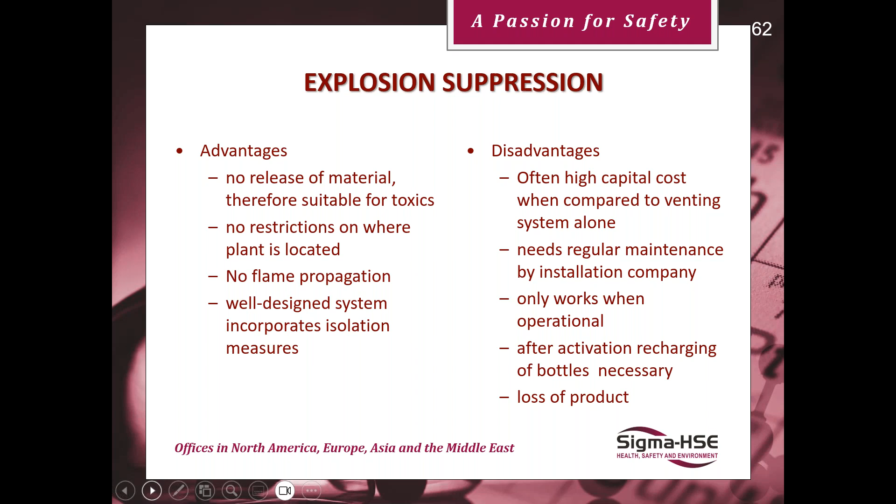Disadvantage: high capital cost compared to vents, needs regular maintenance by the companies that installed it, only works when operational. After activation, you need to recharge the bottles, etc., and you lose all your product.

Typical pictures here with a fluid bed dryer and a dust collector.

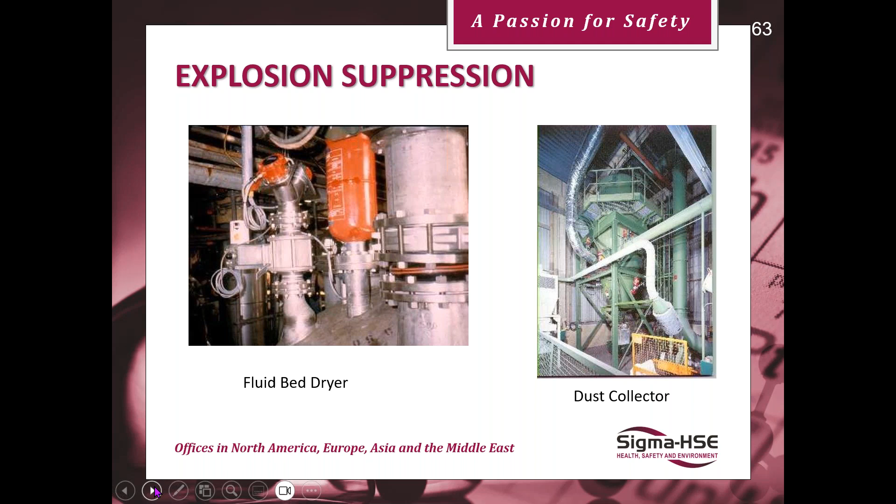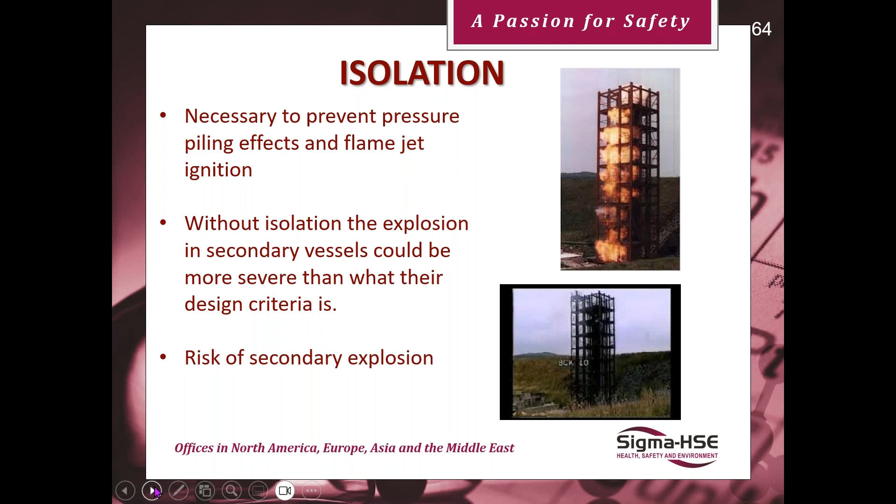Isolation - as I explained with Imperial Sugar, the biggest failure they had was not putting in isolation. This prevents pressure piling effects and flame jet ignition. Without isolation, the explosion in secondary vessels could be more than the first one - basically 2 times the initial start pressure. So if you've got 7 bar in the first one, it starts off with an additional bar in the second, and you end up with 14 bar. So the secondary explosions are often the ones that do the most damage.

Two types of isolating equipment here: rotary valves, fast closing valves.

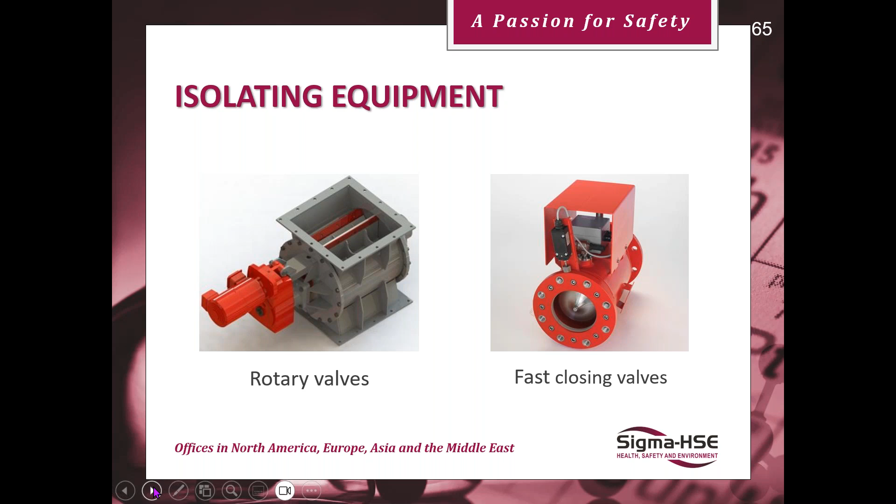So, summary for explosion protection: always have the flammability characteristics of your materials. Review the SDS to see if there are other hazardous properties such as toxic. Review the hazardous area classification to identify where the equipment is located. Look at venting and suppression systems to be designed and installed correctly, as should fire protection. For containment, the vessel needs to be certified for use at expected pressures, and obviously I spoke about the maintenance - they have to be trained.

Location may be a problem for venting. It has to be outside, and I've seen vents facing the building, facing roadways, I've even seen one facing a canteen where people queue. So be very careful where you put them.

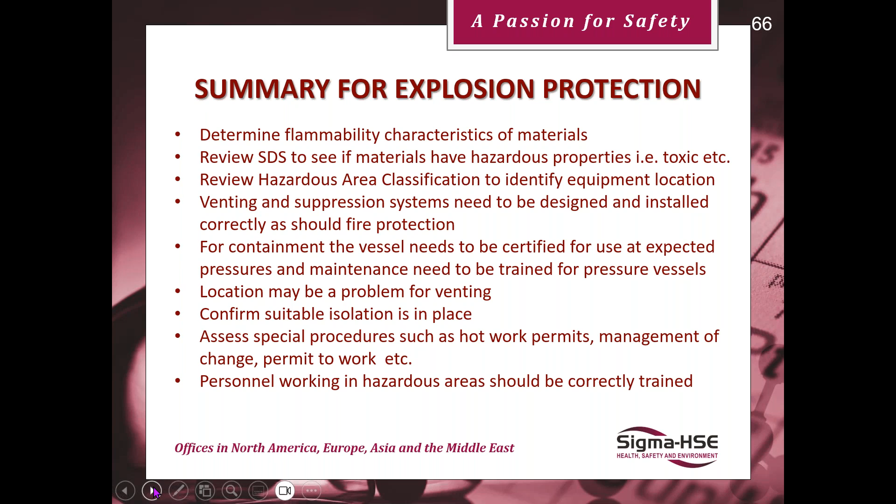Confirm suitable isolation is in place - again, often missing. Assess special procedures: hot work permits, management of change, permit to work, etc. Personnel working in hazardous areas should always be correctly trained.

For fires and explosions, normally 3 choices: prevention, avoidance of ignition sources, and protection.

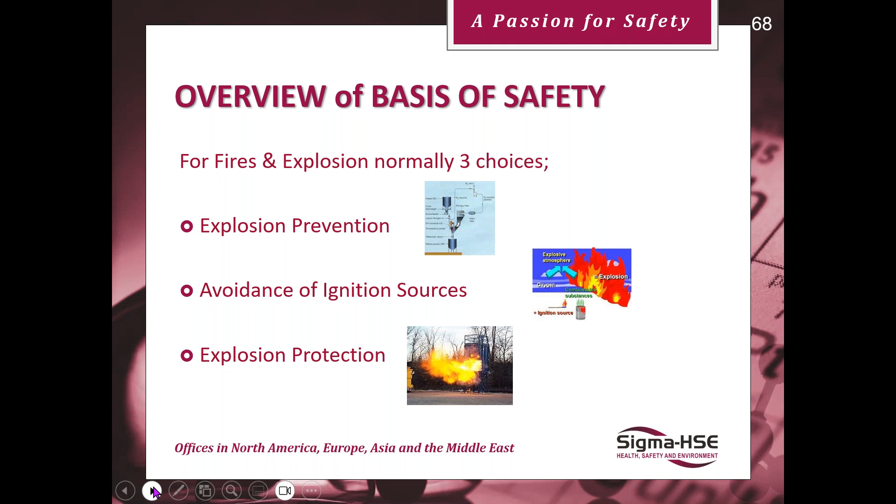Explosion prevention - several ways to achieve this: change flammable material to non-flammable, not very often the case because you're making something. Remove the oxygen, pretty common. Inerting, especially with toxics. Work outside the flammable range for gases and vapors - easy to do, not easy with dust, because you always get a slug of dust coming through the system, which takes you back into the flammable range.

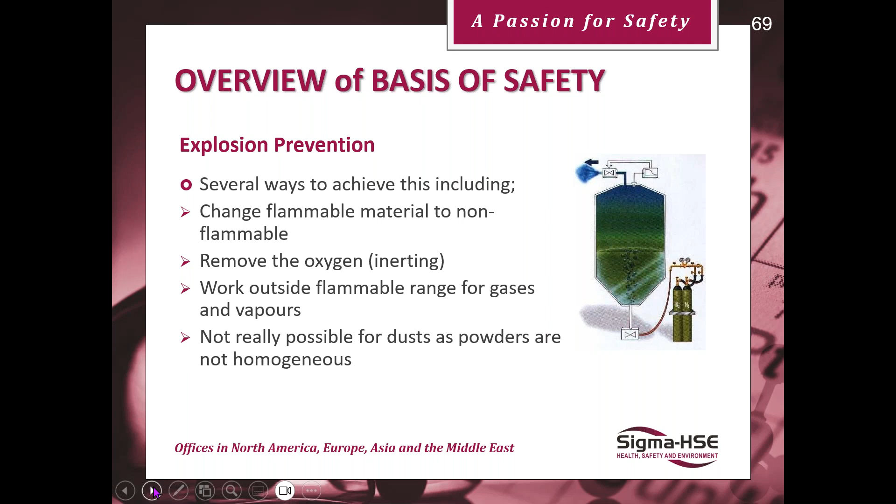Avoidance of ignition sources: we talked about EN 1127, 13 potential ignition sources, but the most common are hot surfaces, naked flames, hot work and fires; electrical systems which are poorly installed and maintained; electrostatic discharges; mechanical sparking; and unsuitable mechanical equipment.

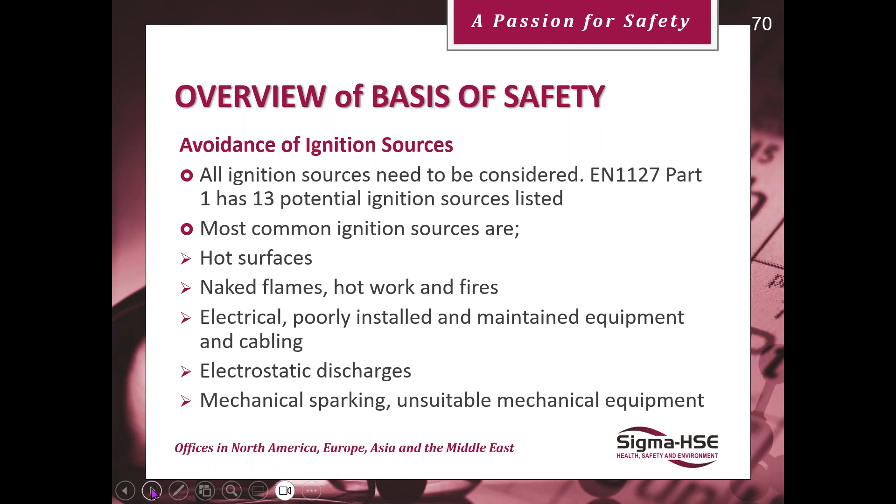Look at material properties. As we said before, without them you can't prove the basis of safety. Minimum ignition energy for electrostatics and mechanical ignition. You may also need further electrostatic properties such as powder volume resistivity, charge relaxation time, or chargeability, depending if the material is conductive, static dissipative, or insulating.

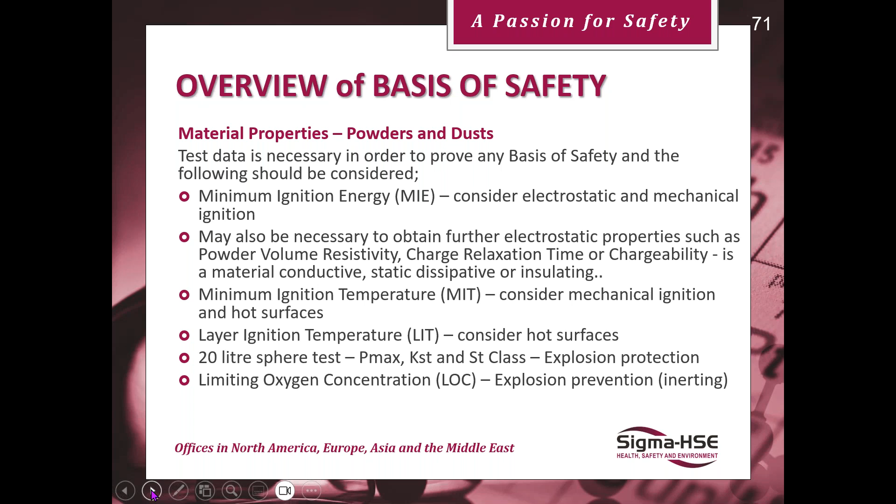Consider the minimum ignition temperature for mechanical ignition and hot surface, layer ignition temperature for hot surfaces, and 20-litre sphere testing - an absolute necessity to get the Pmax and KSt for explosion protection. And limiting oxygen concentration - don't work on 5%, get the information, then you know you're safe.

Hazardous area classification, very important. You know where equipment is, the type of class you're working in, how often the material is exposed to ignition sources. Consider all ignition sources there, including the top 5 or 6. And if necessary, you may have to do an electrostatic audit of the plant.

Many times I've done this and found earth leads, flying leads, especially on LPG filling stations, which are there, but when you check them, the lead's broken and not connected. So again, these need to be part of your maintenance procedures - you need to include those. If the MIE seems to be low, or you've got gases or vapors present, definitely get an electrostatic audit done.

Look at your equipment specifications and their suitability for use, your standard operating procedures, make sure staff are trained, do your risk assessments to ensure you know everything you want to know about the hazards of working with these materials.

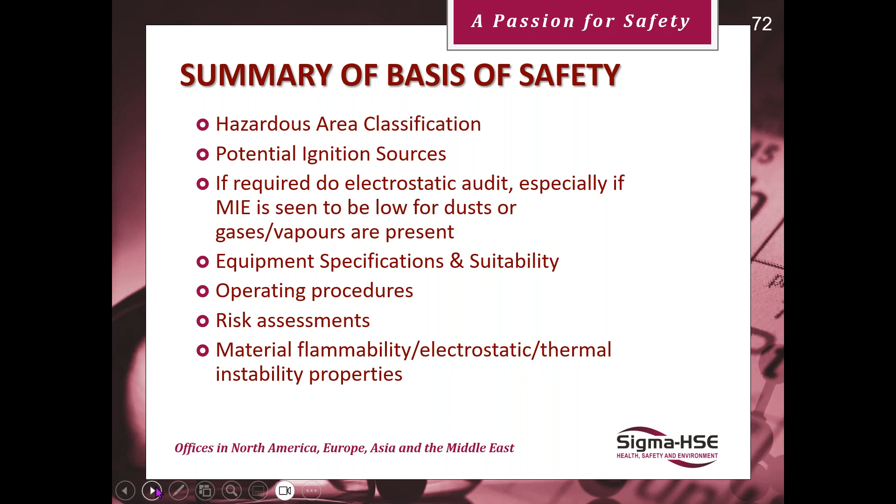Consider material flammability, electrostatic properties, and thermal instability properties. Assess the process to understand manufacturing hazards: charging, discharge, and mixing. Process maintenance procedures, hot work permits, management of change, permit to work. And consider personnel working in hazardous areas should always be correctly trained.

Determine what basis of safety can be used and confirm that it is suitable once all information has been analysed. And if you're going to have deviations, see if it still holds.